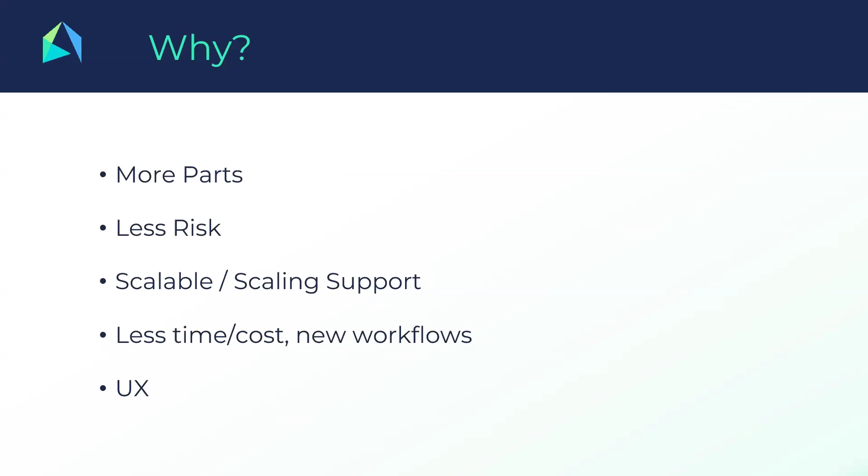And you want to spend less time on nesting, because it's something that needs to be done, but you can spend hours on it, or you can just do it in minutes. And you want a user experience that is at least reasonable, allowing you to work quickly, easily, and the way you like to work. And all that is related, as I mentioned already, to cost per part.

Because if you have more parts broken in your batch, obviously that's raising your cost per part, and that's related to putting more parts in the batch, which might be a good thing, and which of course brings you a lower cost per part. But if on the other hand the risks increase, then it will again increase your cost per part. So it's finding that level between quantity and quality that you need to be able to play with when looking into build preparation in general.

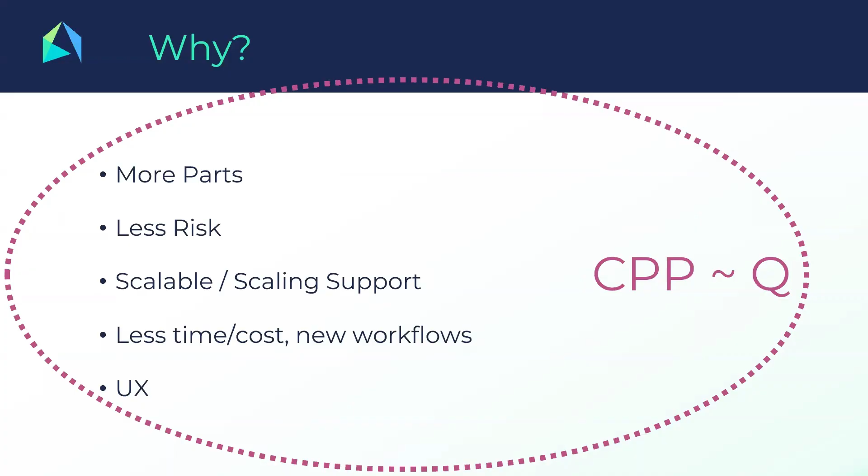And so that's our focus. So anything that helps us with that focus, we believe also helps you. And that's again why we want to hear it from you. Now, in version 3.0.2 — actually, 3.0.1 was only a month and a half ago or something. So we're moving fast. We're bringing out new features quickly.

And in just over a month, we added, for example, the automatic collision checks. Automatic meaning they can be automatic; you can choose that in the preferences. I will demonstrate that later, or you can do it manually as you wish. You have a lot more options when it comes to the part list output, also to output it as a JSON file, which means you can put in a lot more data, which you can reuse in your automation or in your upstream and downstream workflow, your MES systems, etc. And that touches already a bit on automation, something I will be mentioning soon.

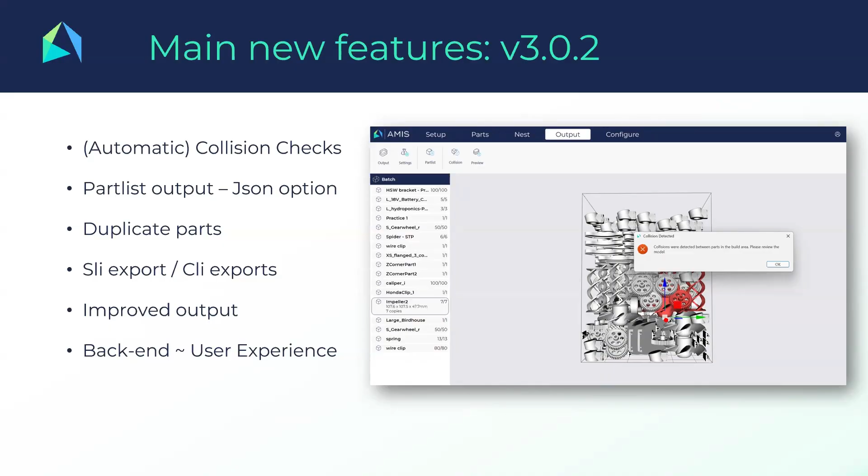You can now duplicate parts. You can do SLI exports, CLI exports, which is of course needed for a couple of SLS machines. There is an improved output, which maybe you won't notice, because in the back end quite a few changes have been made. Some of them very noticeable, others a bit less. But for example, on the output, you will see that the user interface is much easier. And that hopefully makes your life a bit easier in that sense. So that's what happened recently.

And then an, I would say, exclusive announcement, because nobody else has been informed yet. On February 16th, so in two and a half weeks from now, we will launch our AMIS runtime. I should say officially launch, because we already have a couple of users who are currently running the system, or currently doing tests with that system.

And it's, I believe — no, it's not just I believe, I know it's actually unique. There is no such system available at the moment, allowing you to do real scripting on your build preparation and to fully automate and link your build preparation to your entire workflow. So more details on that will follow. You can all read a bit of the promotion that's here on the slide.

More details will follow, and for a couple of users among you, this will be highly interesting as we move forward on better, more automated nesting. We're definitely looking forward to that. By the way, this is fully operational already—it comes with examples and full documentation on the runtime. So once it's out there, if you're interested, give us a sign and we'll get back to you.

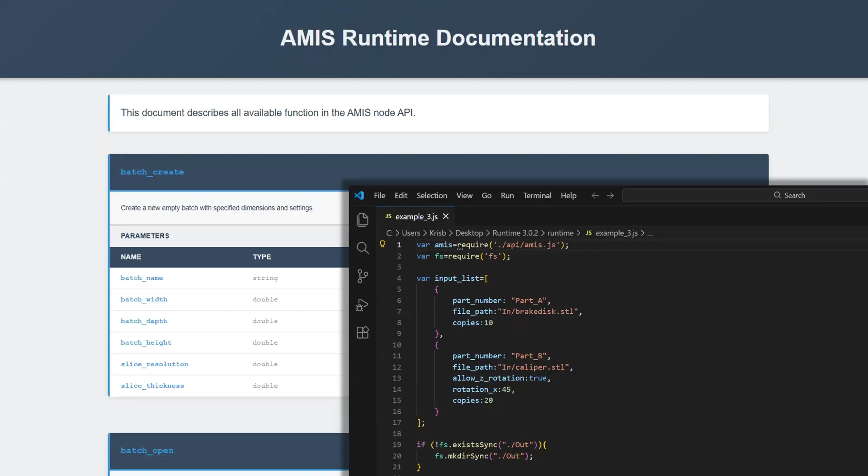I promised to keep it short, so let's move on to the demo. I think it's important to mention that a lot of these examples actually come from our users—things they struggled with, or new approaches they found. Those stories are very welcome because we can immediately reuse them in our demos.

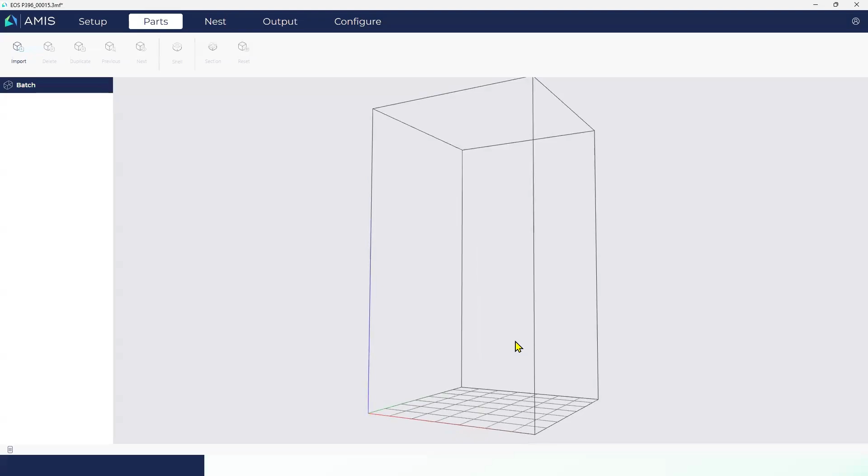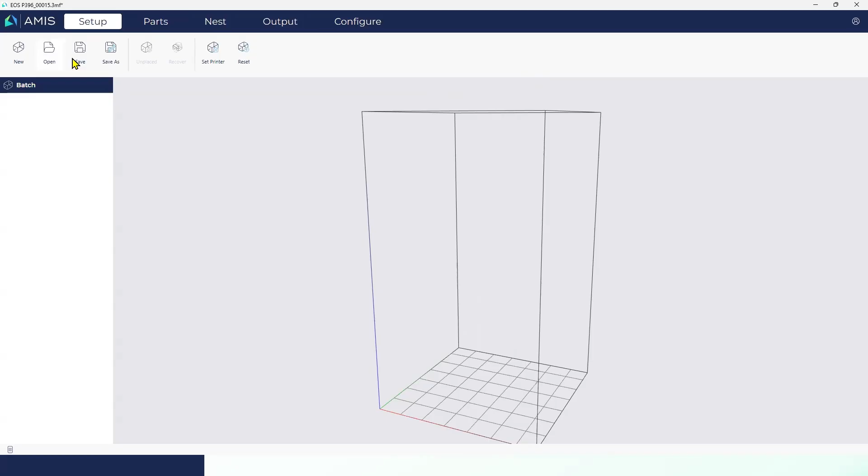So here we go with batch number one. It's an EOS P396, although you might notice there's actually a no-build zone missing in the printing batch area. That shouldn't be difficult to fix—it's just the same amount of clicks. You can either start a new batch with the same dimensions in setup, or open a printer that's already predefined. Here I've got my P396 predefined with this no-build zone already included.

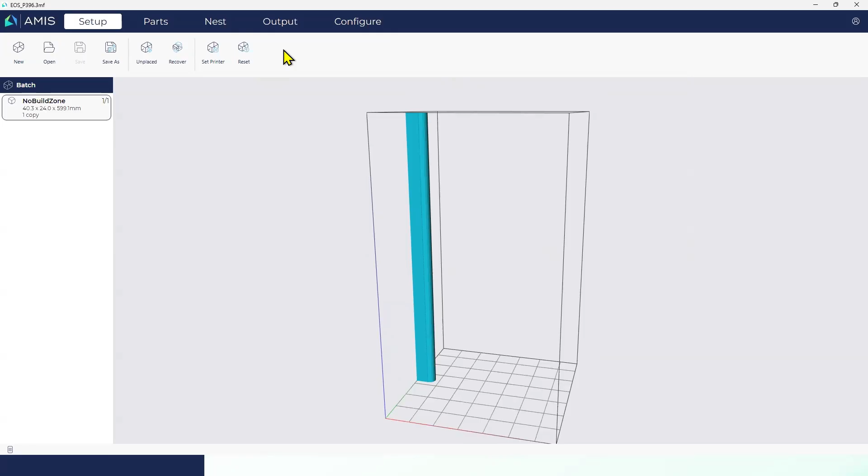I've made this a hollow part, because it will have much less impact on the nesting density—it's in there, but hollow, so it doesn't influence our nesting procedures. As most of you know, in AMIS Pro you normally go left to right with setup and then parts, though you don't have to—you can always go back. Let's put in one specific part. I'm starting with just one part for now, because it was a question I got yesterday from someone in this webinar.

A question we get quite often is about import—do you do a check and healing on import? Some people are used to software with lots of parameters for import and repair settings. The answer is, you normally don't need that anymore. We do a check upon import on file integrity, and we repair a lot of things automatically at the import phase.

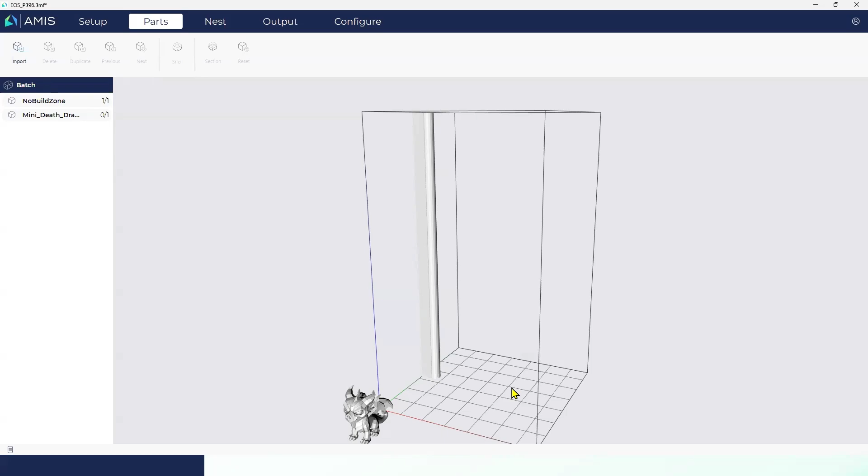So basically, we're still looking into this. We did have a few parts sent to us by users saying there was a problem importing, even though it seemed okay—so we adapted that, but it only happened once or twice. If you still have parts that won't open here, we'd be glad to know, but we repeat that request every time and never get parts that aren't properly imported. So yes, we do file checks, yes we do file repair, but it's automated and done upon import. That's an important thing to know.

The question I got yesterday was about parts where somebody wanted to do shelling, but didn't want to redo that shelling every time upon import. He wondered if there was a way to save the part. Actually, yes, there is. So let's take this part—hang on, I'll double click.

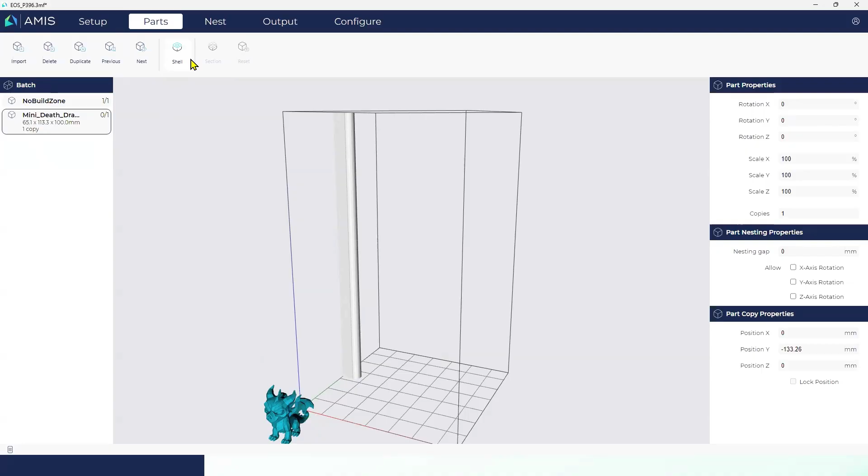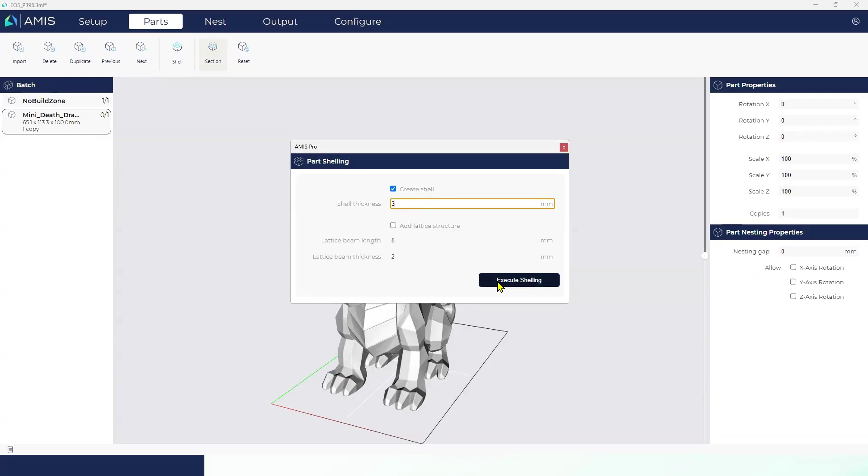We're in the part view now, and I click the section view so I can go through the part. You see it's not shelled yet, not hollow. So let's put a shell in here, for example 3 millimeters. For people new to AMIS, you can also add a lattice structure and change its dimensions here. But for now, let's just add a shell to this one—there you go.

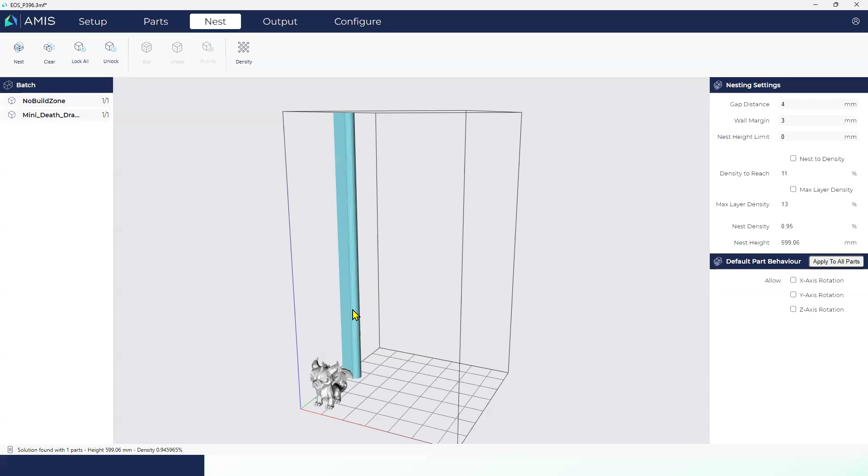That's the shelled part. So the question was, can't I save that part somehow? Well, actually you can—if you just nest the part, you do have to remember to delete this one, then you output the part.

And now I've already, oh, this is a TIFF. I will change that in the settings and make that a mesh 3MF file. There we go. So there we got the output part.

And if I now reopen just any printer, but I will go back again to the 396, I can just import that one part, which I think I saved on my desktop. Okay, I keep on forgetting that. Then it's hopefully here. Did somebody see where I put it? I don't.

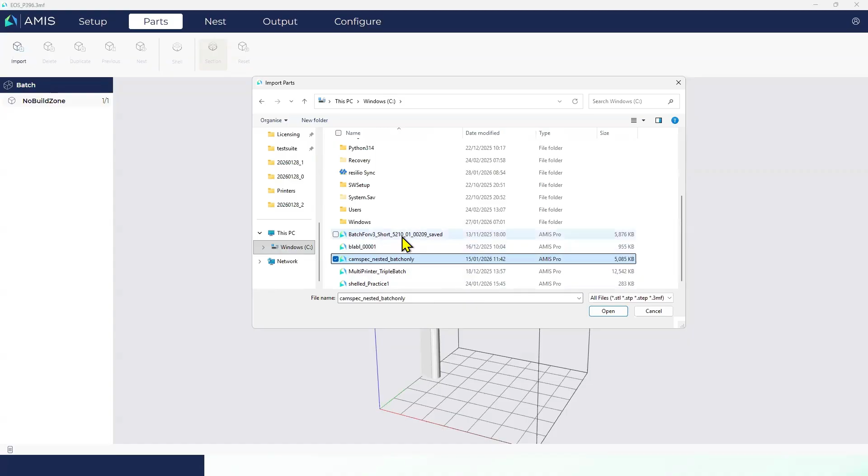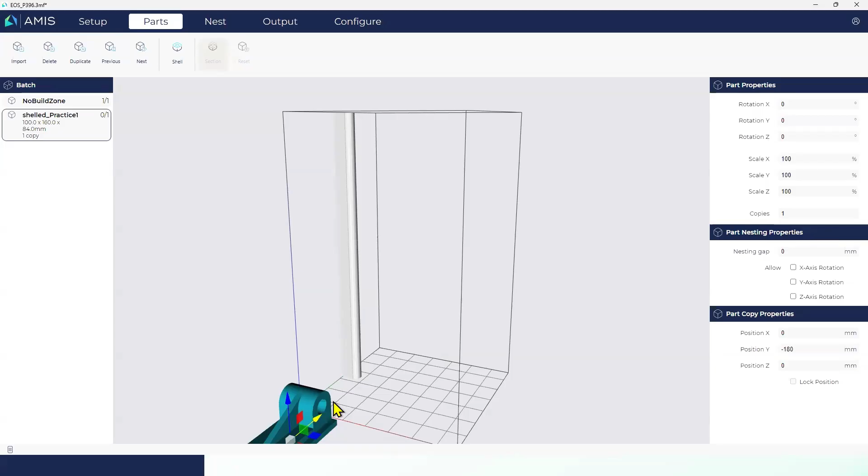No, this is another shell part which I used. But anyway, the part that we exported is saved as a 3MF file, which can then be re-imported and is saved as such, of course, as a shell part for future use. So that makes things quite a bit easier.

Now, I already noticed, and maybe you didn't see it, on the output, things got quite a bit easier. Meaning, it used to be possible here to click on the output for a 3MF, an output for an STL file, etc. Now we just connected the printer with the output type, meaning that once in your printer, you will configure what your output type will be.

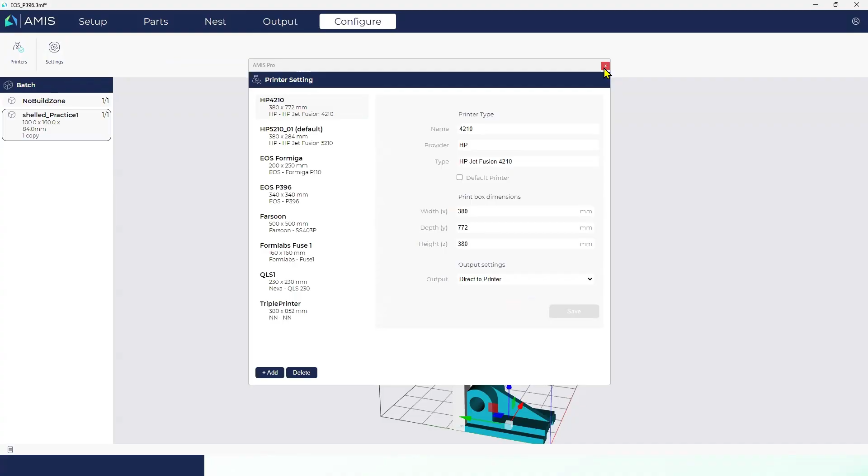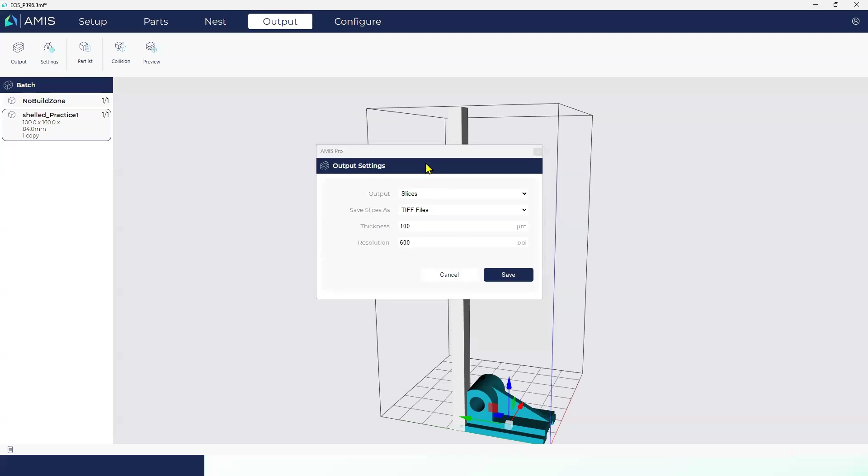So you don't have to redesign that each time. And as that printer has been selected, it will automatically, when you output it, select that preference. So here for the EOS, apparently I put in that it should be saved as a TIFF file, so it will automatically indicate that. Nevertheless, you can still overrule that. You can go to settings and change it here so that you overrule the normal printer settings.

So that's a bit a new view for many of you. But it makes it easier because there's no changing of settings or no selection needed anymore. You can just output.

Now you also see that I created here a nice collision, which, by the way, is still the only way you can actually have a collision because the nesting algorithm doesn't allow for collisions to happen. But of course, if you have a full build box with lots of parts in it and you move one a bit around, it is possible that you create a collision yourself.

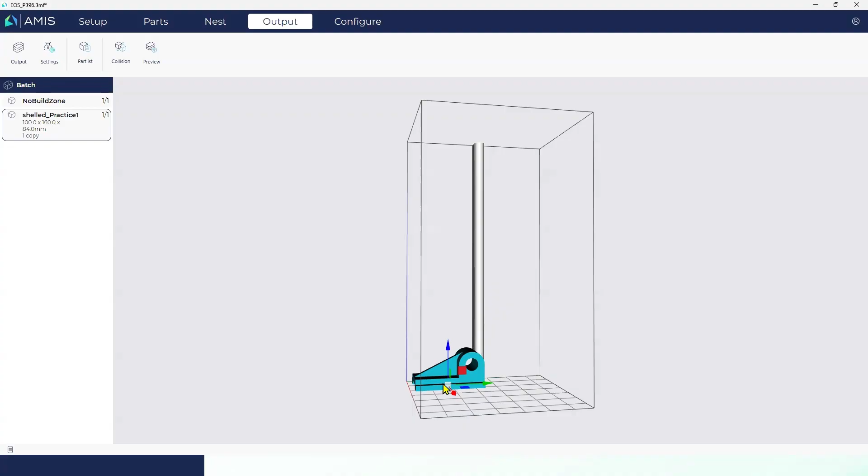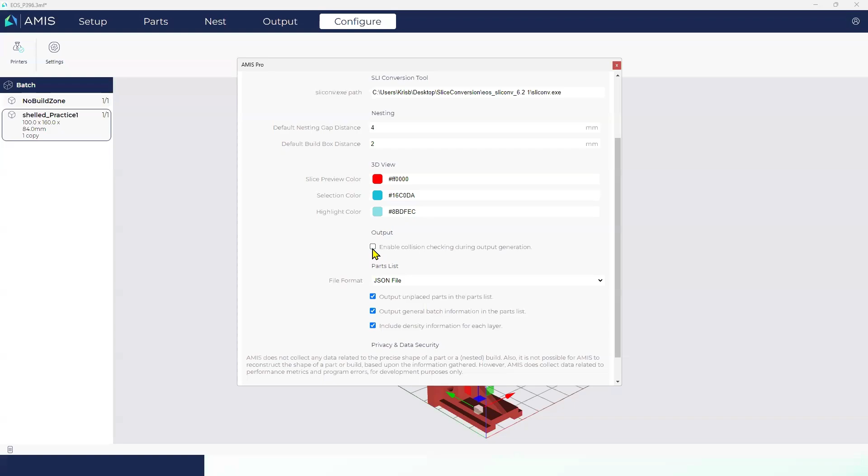Now you can do a collision check. Here's the button, and so indeed, yes, a collision was noticed. But we also made it possible to do that automatically, as I indicated before. So in your settings, you now have this extra output, which you can put on or off, which enables the collision checking at every output. So basically that means you're safe. If you put that on, automatically when you output something, it will first start with doing a check on the collisions. You can put it on or off as you wish, but please don't.

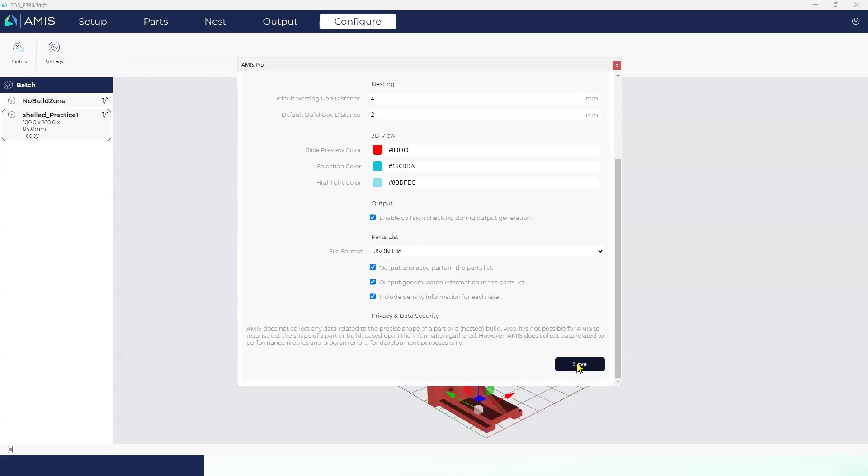Please remember to click the save button here below. Otherwise, it won't be saved. So that's already a couple of new features in there.

Okay, let's move on perhaps to a next batch. I will discard this one. I will create a new batch and I will start adding some parts inside. And then, of course, I have to go back to my workflow. Here's my backlog. Let's put in something that is quite...

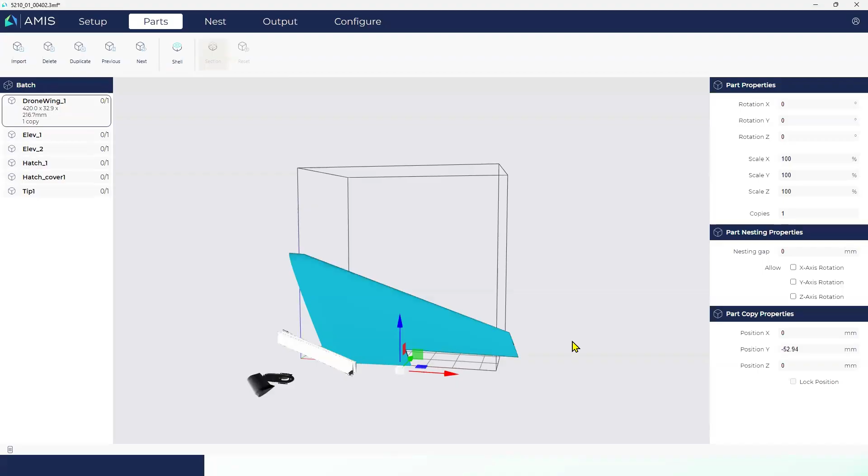Well, seems to be a lot of demand at the moment for this. Some drone parts that I put in, and then actually it was also just a couple of days ago that a customer asked me, okay, I want to rotate this part because it doesn't fit into the build box, but if I double click it to start rotating it, I don't see where it is anymore. I can't really know if I'm turning it correctly.

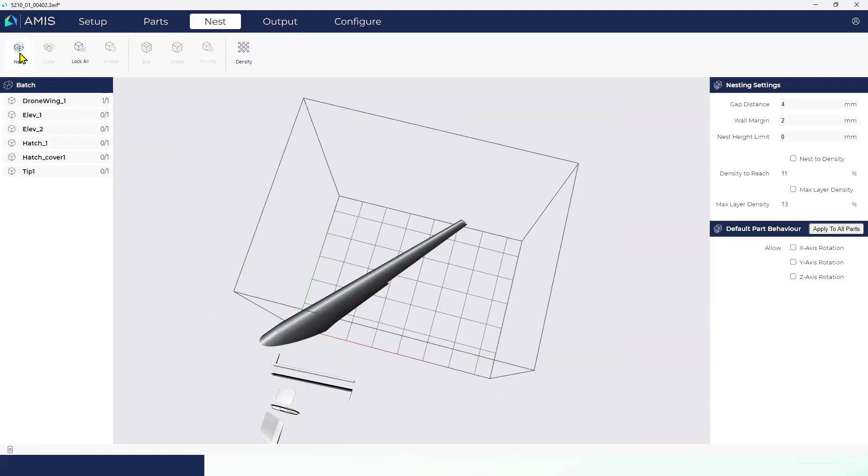Like, oh, let's try something like this. I have to go back, see in my batch, like, oh no, it's still not fitting. By the way, if you just nest once, you can see if it actually fits. No, it's still outside, so it means it doesn't fit. So he was struggling with this idea that you can't see how it actually rotates. Now, I think it's very important to realize, and it's also mentioned here in the settings, that you can rotate your parts also by using these shortcuts, Alt X, Y, Z.

Most people put it at 15 degrees. So basically your part manipulation with each click will be 15 degrees in X, Y, or Z, because obviously that works very quickly for your daily or normal rotations.

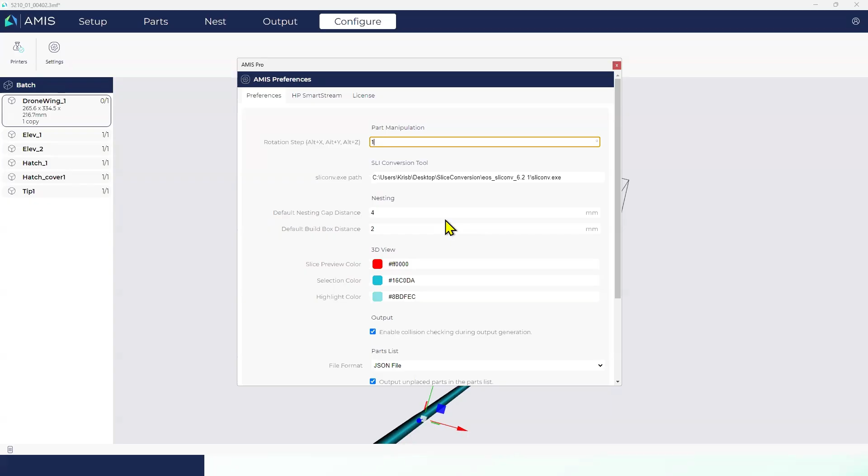However, in this case, I'm going to put it at 1 degree, and actually it does go quite fast, so there's not so much reason not to. I go clicking Alt Z, and I just keep it in rather than clicking 15 times, and then I rotate. By holding Shift at the same time, I rotate in the other direction, so you can immediately see if it will be fitting your build box.

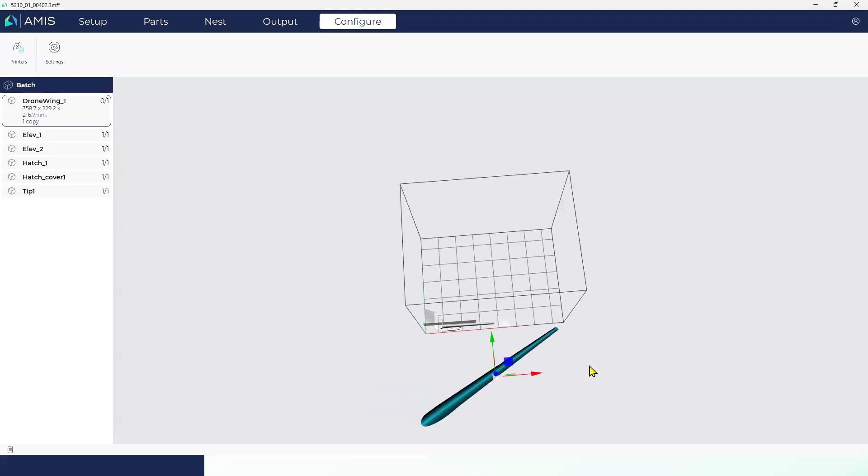So if I now try to put it in, normally the part should fit in there. Good, so that's one part in, but obviously that's not enough yet. So let's continue building this specific batch, this specific build.

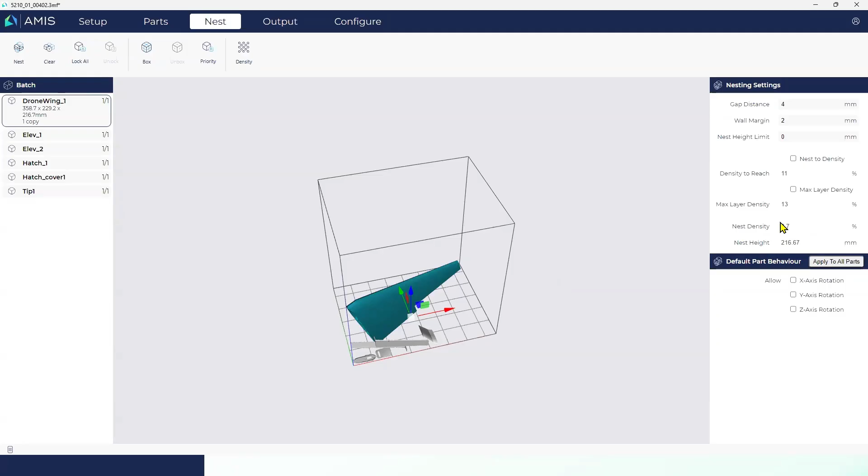Quite often the difficulty is those wings, because you want to print as many as possible, but they take a lot of place, whereas the other parts are quite small and easily fit in. So you end up quite often with nesting densities for this type of part which are very low. So basically, you want to try and put in more parts.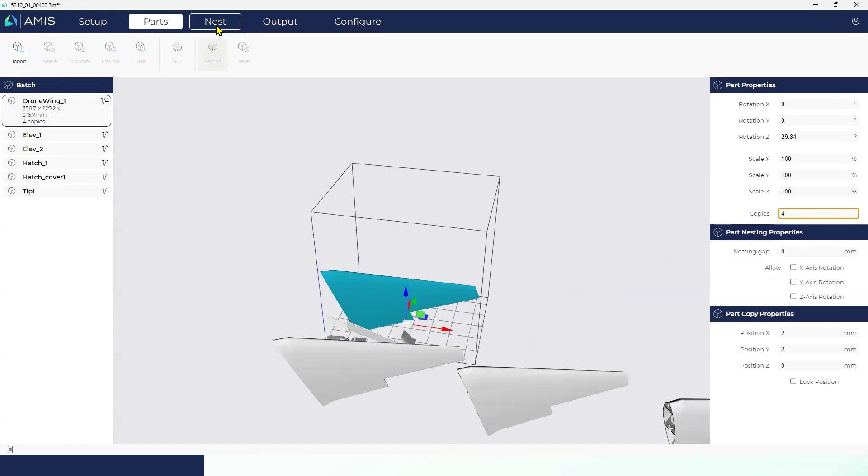Now let's start with these wings, and I go again to parts so I've got my part details here, and let's put in some more copies. Let's see if we can fit in 4 parts here. I first want to work on those because they're so tall, and I want to see what I can do to improve that. Okay, seems like I can get in 3 parts without any further movements.

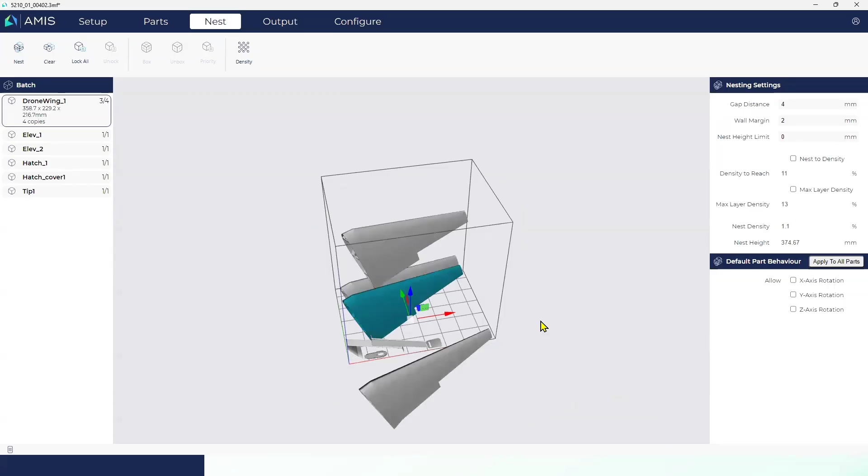And I would like to, if possible, have 4 parts maybe. So let's see if we can get in more. Now there, we got 4 of the same parts here.

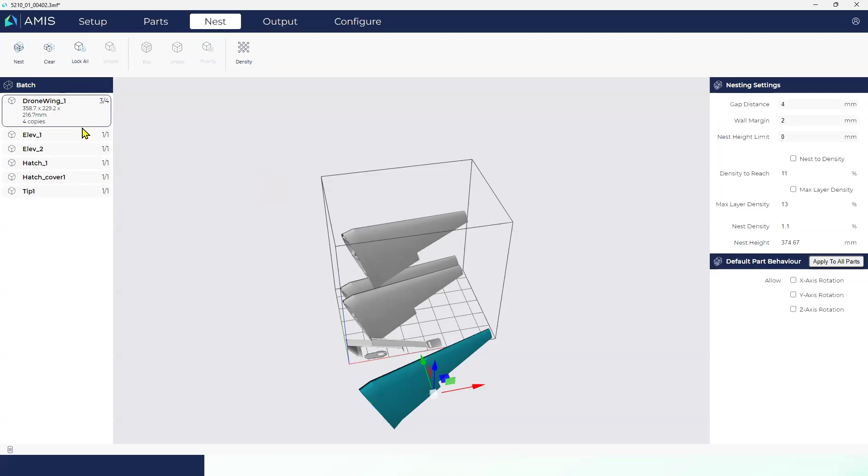Of course we work with, and that's an important distinction in AMIS, the difference between more copies of the same part versus a different part. First, nesting different parts costs a lot more time in the nesting. But it also works faster if you have more copies of the same part, because it's easier working.

But in this case, maybe 1 or 2 more parts will fit if I'm able to change the direction of rotation of these parts. Let's leave those 3 as they are, but maybe another one will fit if I rotate the parts a bit. Of course, if I start rotating this one, they will all rotate, so that's not exactly what I was looking for. I can rotate those, but that's not going to help me get in more.

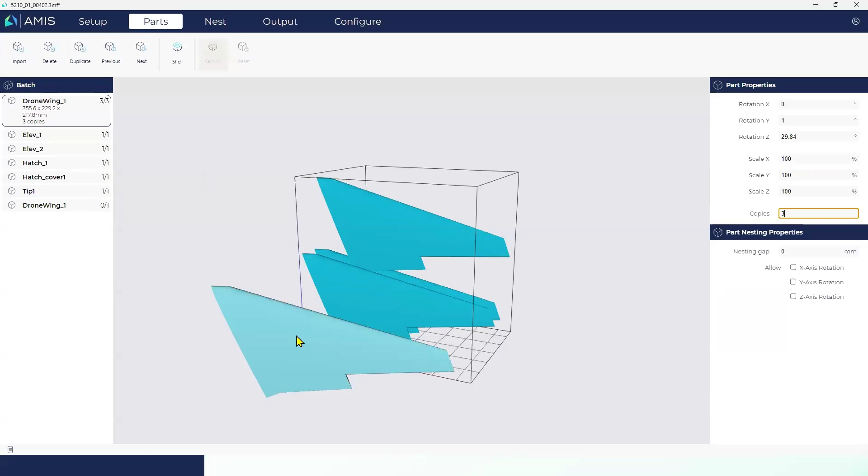So at that moment, I have to duplicate my parts. Now let's first reduce this to 3. Voila, so that I have them all in here. And then I will duplicate this. There's my duplicate, and with that one I again start working.

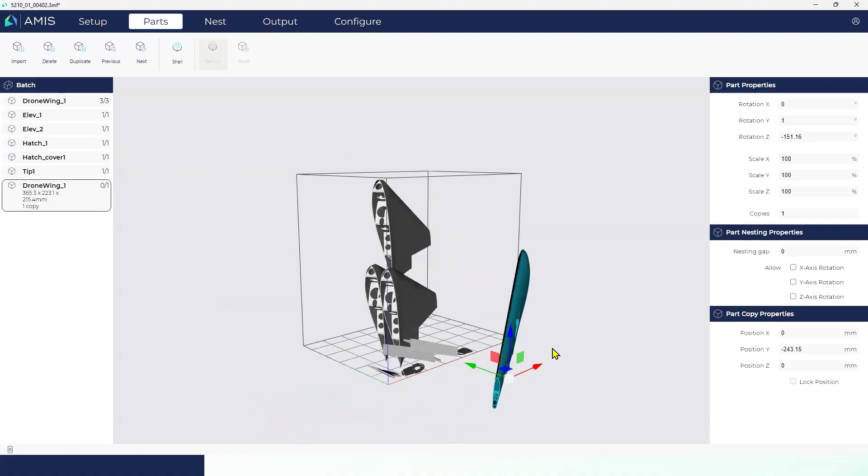Let's again take the top view just to have a bit of a view on what's happening there. And then I'm going to do this rotation the other way around because I want to have it fitting in, hopefully like that. Any part that you win can help in lowering that CPP. Now I'll perhaps also rotate a bit like this so we have more chance of it fitting, and then nest it already and see if that works.

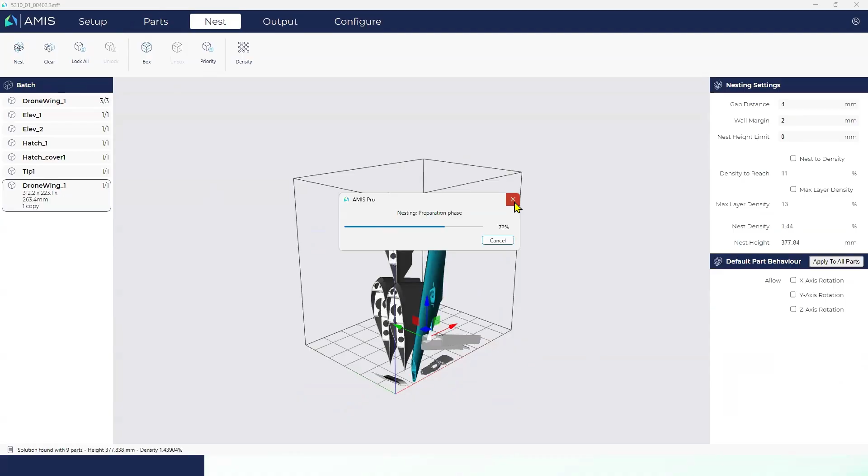Okay, there we go. Yes, it fits in 4 parts.

Now, just for the example, I'm going to start increasing the quantities of the other parts. Let's put in 200 of those. And then again, I don't go clicking here, I use Alt N for next part. So I'm now here, Alt N, next part.

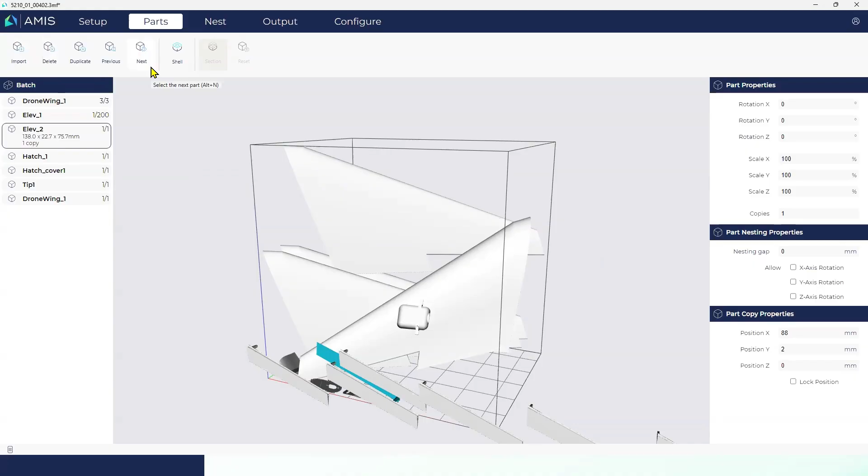As you can see here, if I hover this button, it says select the next part, Alt N, and with the others as well. If you don't remember the shortcut, you can always hover over the button to see what you need to do.

Let's say 150 of those, Alt N, next part. Let's say 100 of those, and then 150 of those. And this last one, maybe 50 parts, is the drone wing.

So I've already entered the numbers of parts. Of course, there are more properties that you can actually influence here in the parts section. You can rotate also by typing here, but before, of course, we did it using the shortcuts. You can scale your parts. You can change the copies. You can also change some of the nesting properties.

So the nesting gap, and later on we'll look at the nesting, of course. The nesting gap is something which is decided on a nesting basis, and the gap distance is 4 here. But in some cases, you might want a higher nesting gap for specific parts, and then you can put it in here for specific parts. Now I leave it at 0, so it will anyway go for the gap distance which is mentioned in the nesting section.

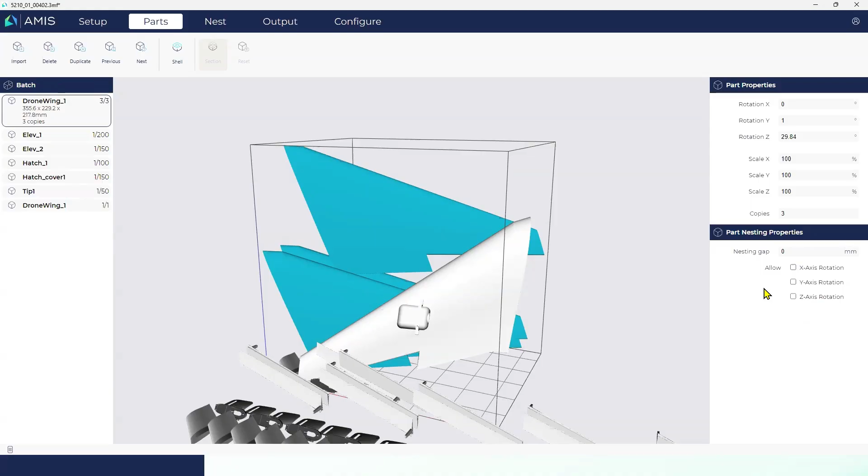And I can allow rotations, meaning that during the nesting, that part is, for example, allowed to rotate over the x-axis or z-axis or multiple axes. Also, if you click on one instance of a part, so one part specifically, I can take one outside the batch, for example, you will get its copy properties, meaning its position.

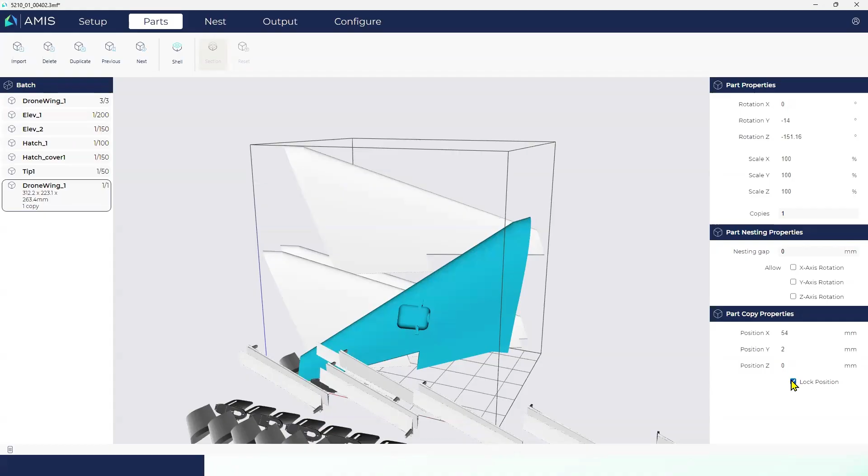Now, this part is outside of the build box, so I cannot lock its position. But when it's inside the build box, I can actually say, okay, you stay there. I lock the position. It won't be changed anymore during the nesting operation. But anyway, we've set all the quantities, we've set the rotations. We think we're good here on this part. The shelling we demonstrated before. So let's see if we can get this one nested.

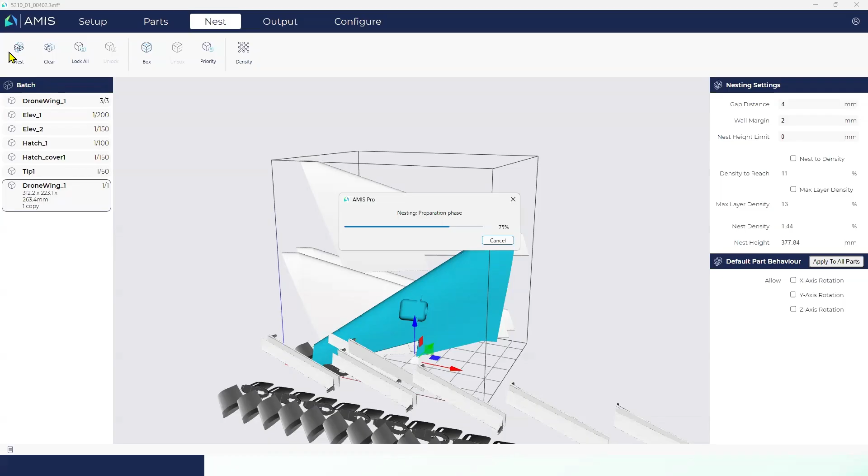And that's already two important things with AMIS Pro. First of all, nesting is pretty fast, so it's meant to iterate. It's not necessarily your final build that you're going to get out at the first try, but you're probably going to iterate. You're going to have a look at the result and then move forward from there.

Like, okay, I'm now at 98% and it's still looking for solutions, and that's then the second important thing: cancel. There is, while iterating, no reason to wait for the 100% because we are still improving our build. We're checking, is this close to what we want, is this approximately what our aim is with this specific batch? Now, I'm a bit unlucky in a sense because I was hoping that my wings wouldn't fit anymore, but they did.

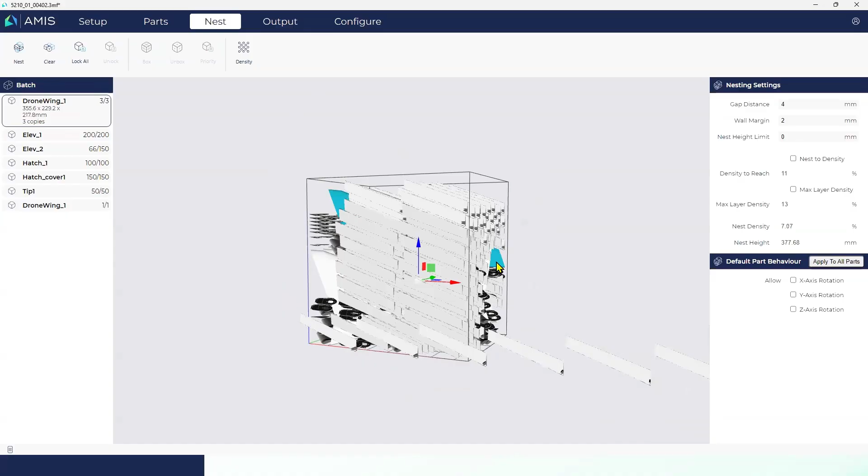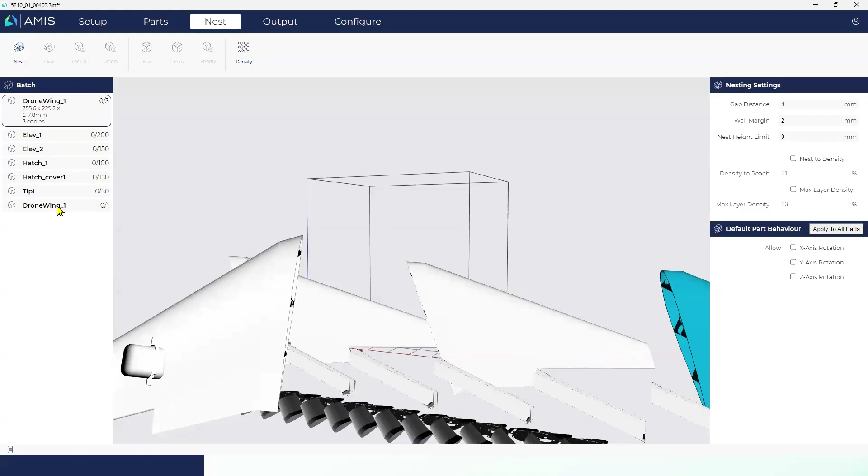However, what I wanted to show is that, and I will clear the batch again, I will just throw out everything and re-nest again. If you want to make sure that certain parts are in first and that they're definitely in, and we already are sure that 4 of these wings fit, then by using control here, I can select multiple parts and give them a higher priority. You see that there is a different sign, so the priority is higher. So the algorithm will first try to nest those before adding the other stuff.

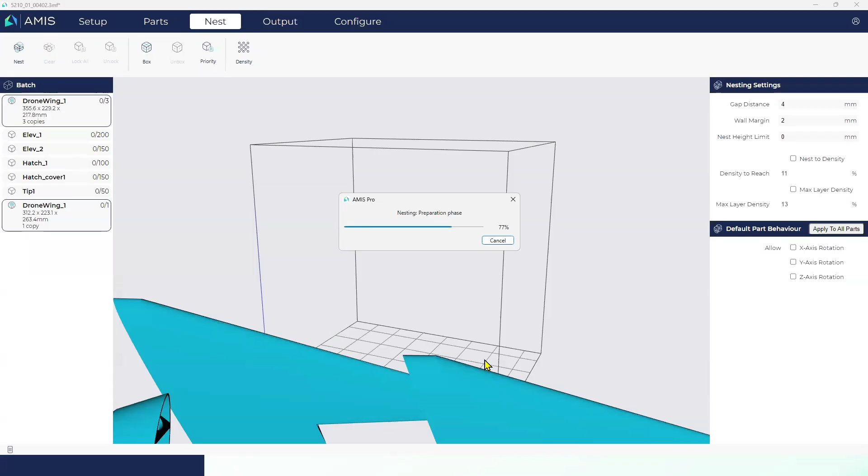And so like that, I'm iterating. So okay, maybe the wings didn't fit in the first time, so I'm iterating and now trying this to get the wings in for sure, so that we're okay on that side. If you would like, you could now also really block those drone wings, meaning locking their positions as set. But for now, I will leave that.

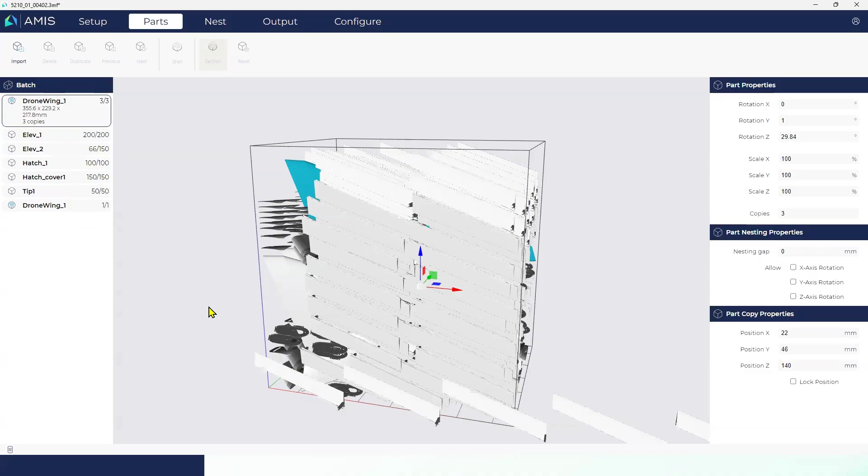Here you see how many parts fitted inside your build box, so you can also make decisions based on that. If you say, okay, only 66 of those, let's try to minimize those quantities and put in a bit more equal spreading there. So that's also a change you could be doing at this point.

I should also mention that with some software, they take the average density over 2 millimeters or something, so it looks like there are much fewer peaks. We give you the density with every layer, so you really see every peak that is coming through.

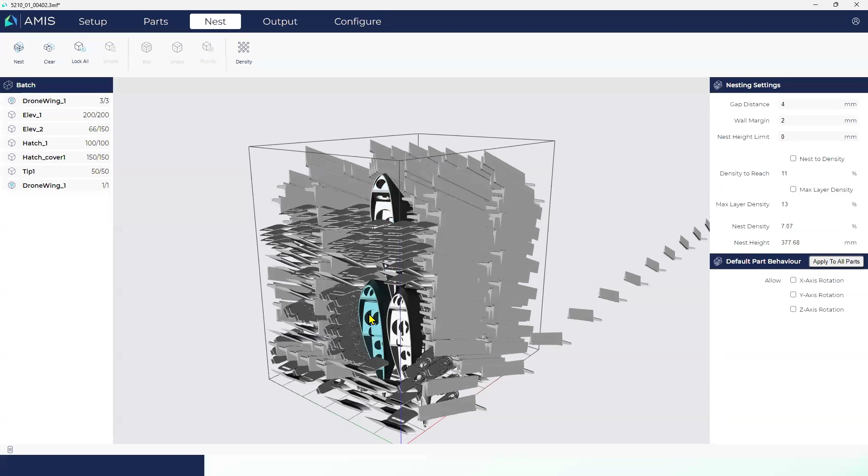And then, of course, it's up to you to decide whether it's acceptable or not. But in the third example, we'll go a bit deeper into that nesting density and how to really go for it, how to really improve that. For here, I think that the most important thing is the part rotation. How can you go about it? So there's a couple of ways. Prioritizing parts and the relevance or the use of that.

And then on the rotation, by the way, we could also, of course, in our nesting still allow the Z-axis rotation, for example, applied to all parts. So now the algorithm has much more opportunity to go looking for alternative rotations of the parts, usually turned over 90 degrees over the Z-axis. So the nesting will take a bit longer. And that's why quite often, if you're iterating your way through it, we see that the users will do this as the last step.

So you're happy with the result already. You're close to what you want, but you want to check if maybe you can add a few more parts. Then that's maybe the right point where you say, okay, I'm going to add more, or I'm going to allow rotations so that maybe a few more parts will fit inside the build box.

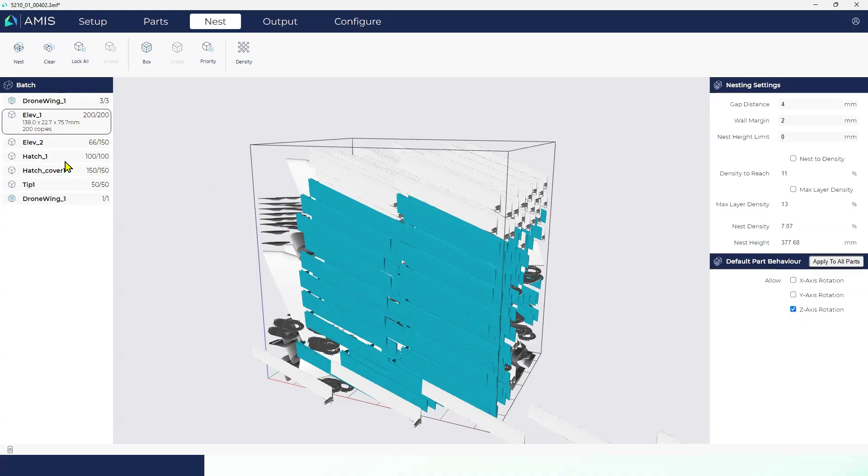One small detail that I didn't note yet. By using Shift and or your Control button, you can select multiple parts at the same time, meaning you can also rotate them at the same time, usually over 15 or 30 degrees. In this case, I'm a bit freewheeling. And as long as I end up with nesting, I'm not afraid of any collisions inside the nesting, because the collisions, if they come, are normally because you put some part in place, you lock them in place, and you created

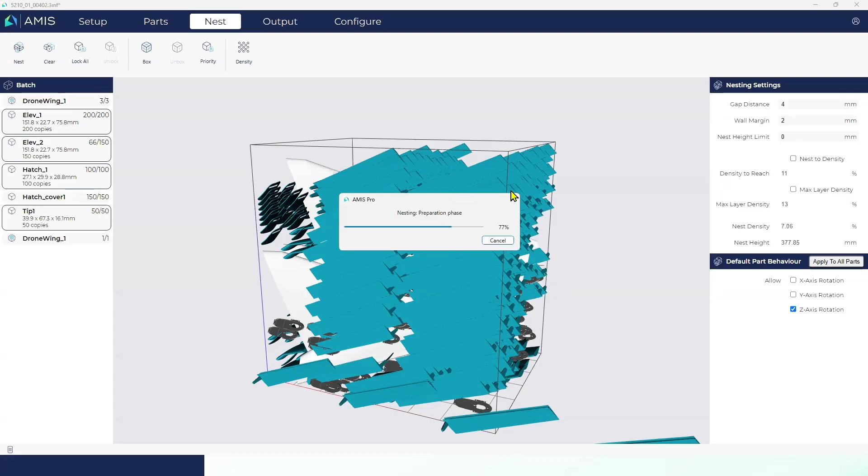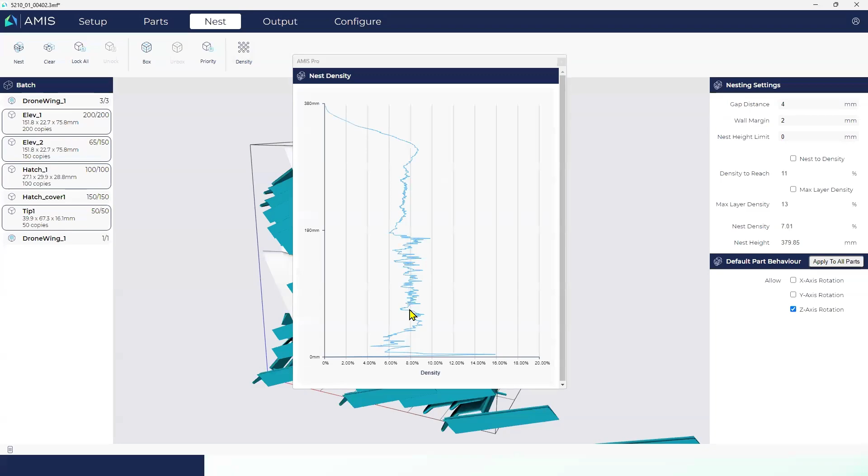the collision by yourself. As indicated, my nesting does take longer because, with allowing this Z rotation, I'm giving a lot more positions to be checked. So that takes a bit longer there. Okay, but we're already at an initial solution with now 7% density, which indeed, given the specific part, is probably the maximum we can get out of this type of batch.

Good. A third example, which will take me another 6 or 7 minutes, which should allow you to still ask quite a few questions. Let's see what we're going to open next. Discard this one, because I want to zoom into something specific here. And that is indeed the multiple batch nesting, but mainly about the densities and controlling the densities.

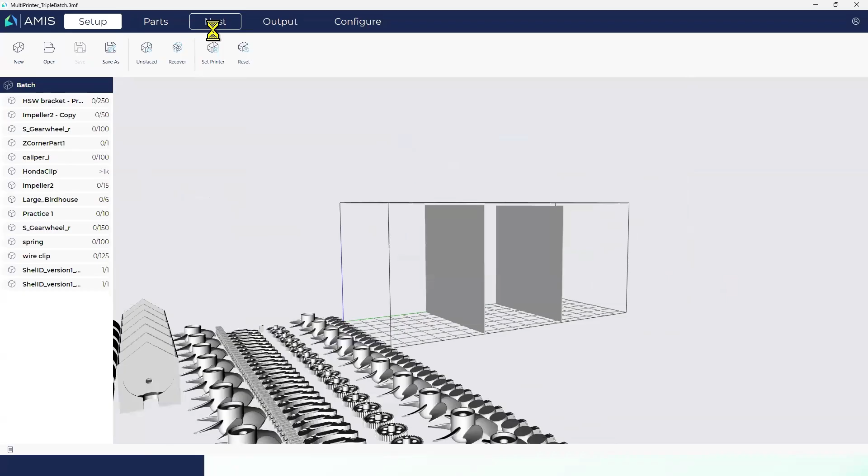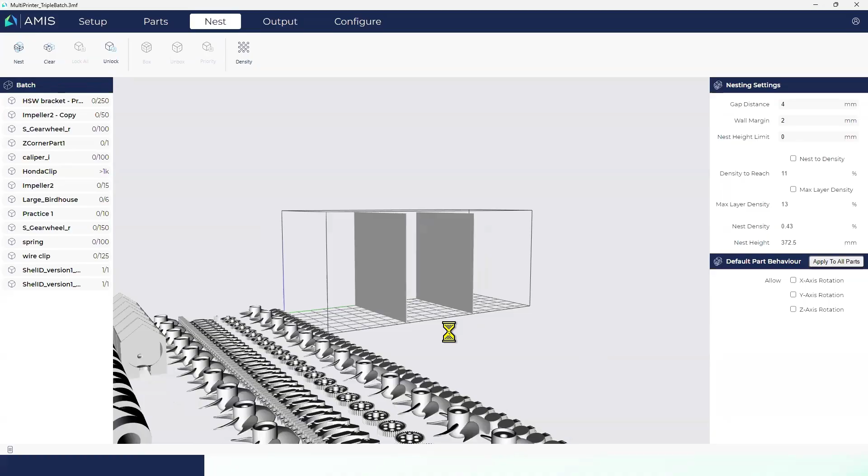This is just an example based on an idea by one of our users. He's having multiple batches, multiple printers to nest in there. What you see is that sometimes if you run it one by one, maybe all your bigger parts will end up in one batch, and then you're left with the smaller parts. And that's not a perfect division of your parts over different build boxes. So he basically built himself a printer.

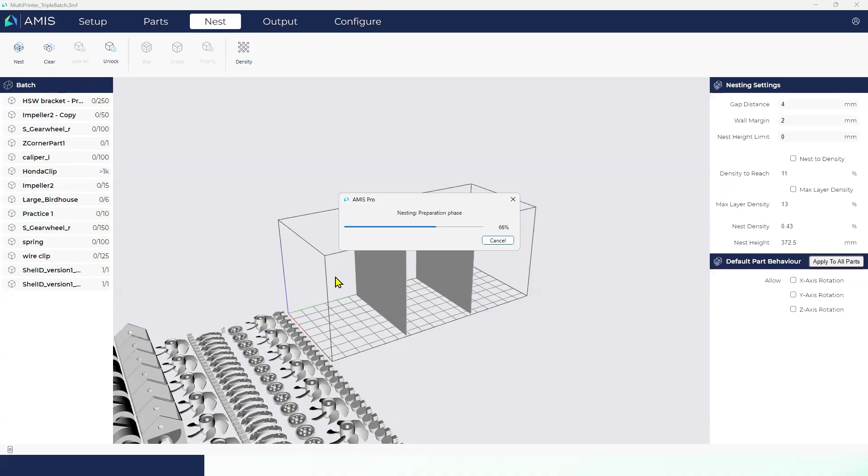He added a printer, which is this one, a triple size printer, and uses that just to get parts divided over different builds. And then what you normally get is that the parts are quite well divided based on their size over the different build boxes. So you can start working with that. By the way, these parts here in the middle are parts that we made ourselves and which we locked in place. Here, lock position, so as to make that division so that no parts are in between two build boxes.

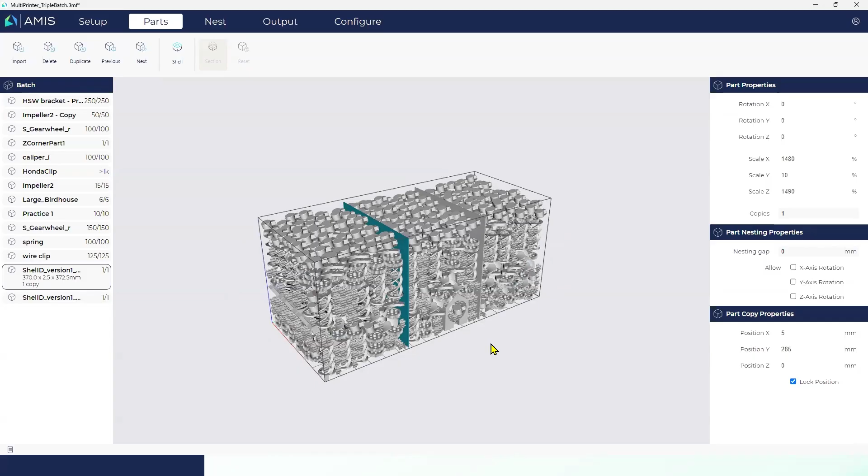That's also something which you can definitely use if you, for example, have SLS printers with multiple lasers, whereby you don't want to go over the stitching zone of the lasers. So then you can apply the same kind of trick. Okay, we're now ending up with 3 printers, but basically you can't really print that. Luckily, you can easily change your printer by clicking here, set printer, and putting that to a normal sized printer. I will update the printer.

So now we've got, I don't know if you can see this well, but this is my one printer. After which I lock all my parts, meaning all the parts inside the build box are now locked. I will clear all the other parts which are left behind, and this is my first build box on which I can start working.

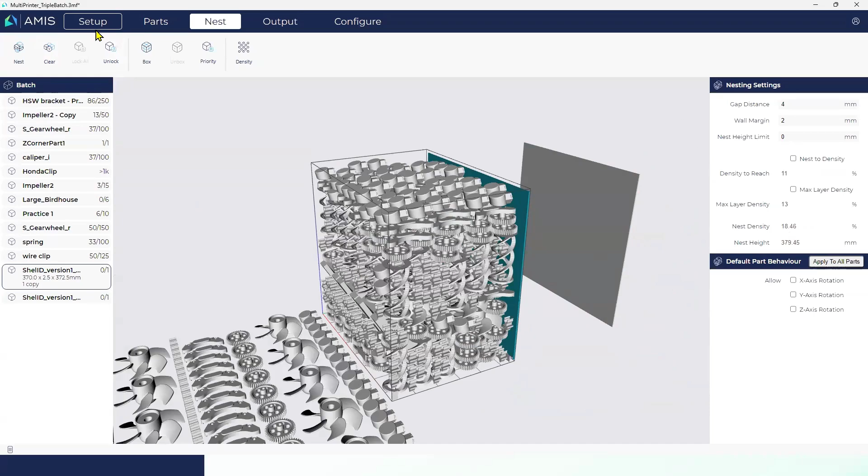Now, of course, this is not an ideal build. If you look at it, it's here a nesting density of 18.46. So that's too high. You just use this to divide your parts, but it's not your real work on the build box, let's say. For that, let's open a quite similar one here.

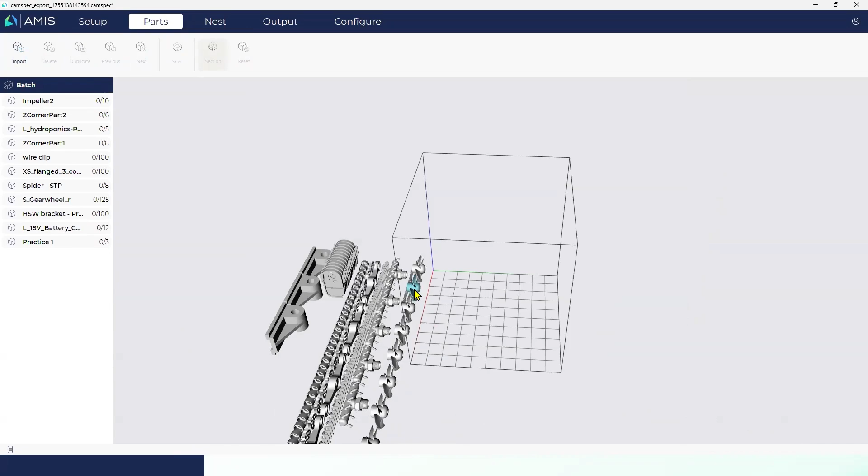There we go. Which is, and some of you might have seen that, a CAMSPEC file, meaning that's a file mainly generated by Phasio, a company we're also working together with on the workflow idea. It doesn't only contain the parts themselves, but also their rotations and their quantities. So I don't have to bother anymore about the part quantities.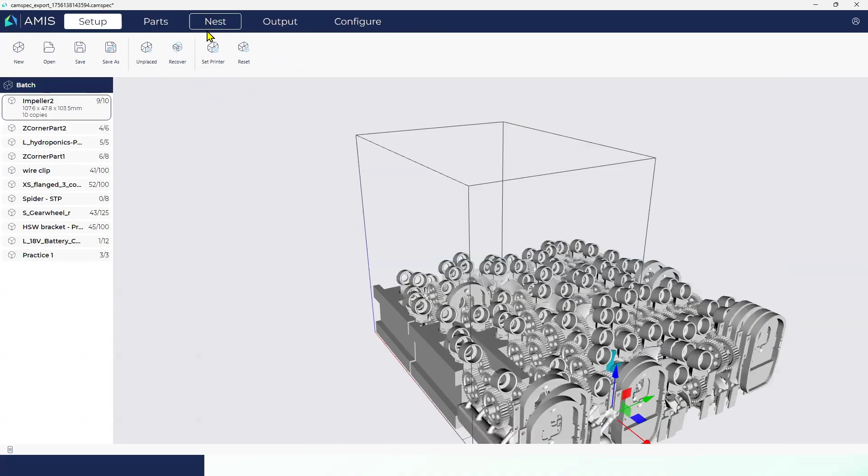Now, if I go nesting this one, what I notice is that I'm actually working on a Farsoon, which was not the idea. So I'll switch it to my HP printer because that's what they were meant for. I will nest again and see what we get there. Okay. The parts inside are very similar to the ones I showed before. So again, we're ending up with a nesting density which is way too high.

The most powerful thing here to work with is your max layer density. Basically, it will limit the density of each layer to, in this example, 13%. Of course, you can put it higher or lower, but now let's try with the 13%, which is set in there. And there you will generate your solutions. Now, first of all, what we see on the density graph is that indeed it's nicely cut off around this 13%. So that's definitely what we want.

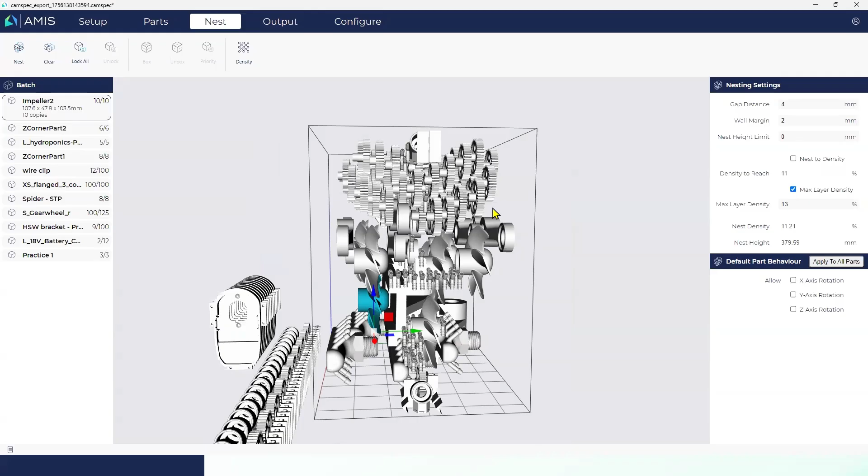On the other hand, what we also see is that the parts are quite a bit in the middle, which makes sense because if you want to check the layer density on a certain layer and move parts upwards as soon as that layer reaches the 13%, it means you have to start somewhere, and we start in the middle because that's the most logical place to start. So that's why they're quite often a bit together.

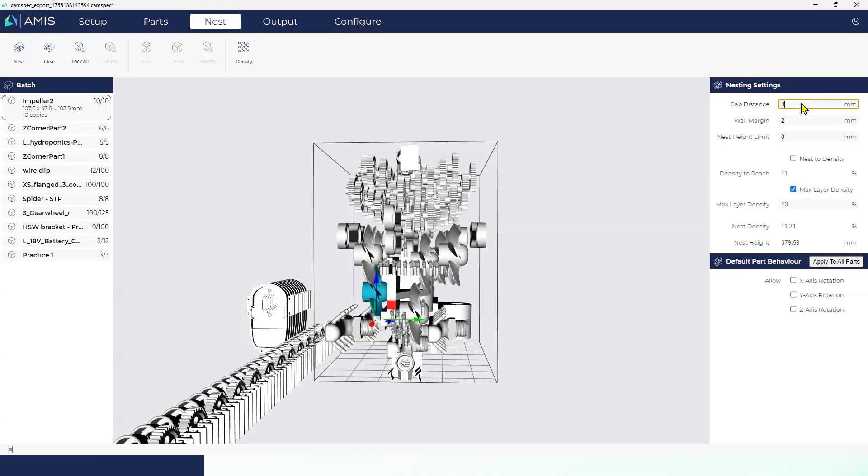So as such, this is printable because we got a nice gap distance, 4 millimeter, and we got a good density spreading. But if this is our maximum to fill up the batch anyway, why would we not increase the gap distance? Because it will lead to an even neater batch and better print quality. So I will just do the same thing with a higher gap distance, and the resulting nesting density will still be the same, but I got more spread out parts.

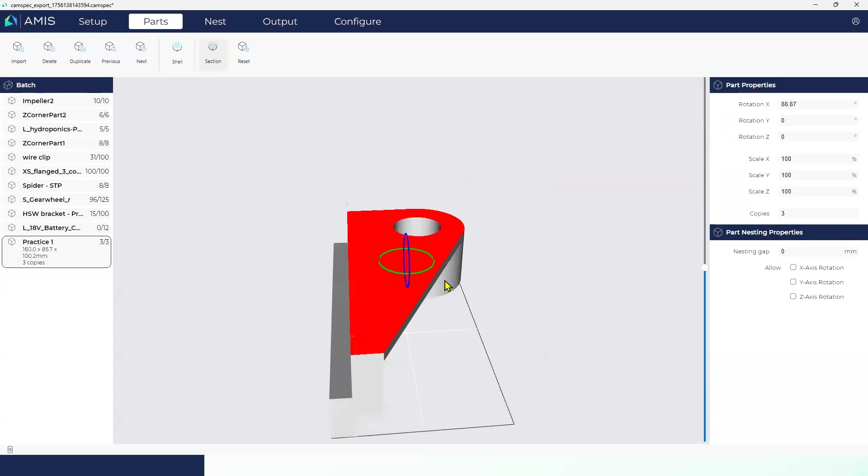Of course, what's ruining this batch is also the fact that these parts have not been shelled. And so they take a lot of bulk mass inside the nesting, so they increase your density a lot. In this case, it's really something you might want to shell, and it will give a totally different result when we nest it. Of course, I know in many cases you're not allowed to do this by your customer, and there are agreements on what it should look like.

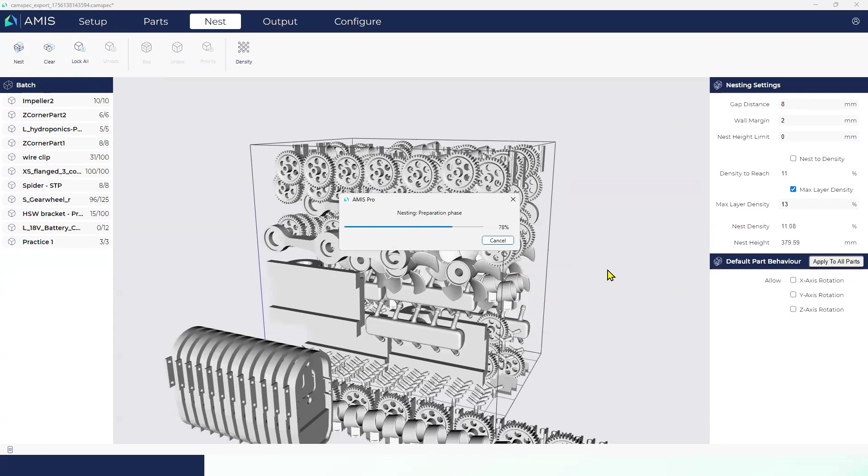But in this case, you will notice that it will come to a much better spreading of your parts. It will give a lot more possibilities to the nesting algorithm to actually put your parts in as you want them. So our density looks good. Obviously, and again, that's the idea with the iteration: it's not like you wait for 10 minutes for your result and hope that it's going to be good. You wait 20, 30 seconds for your result, you check, and then maybe you adapt things.

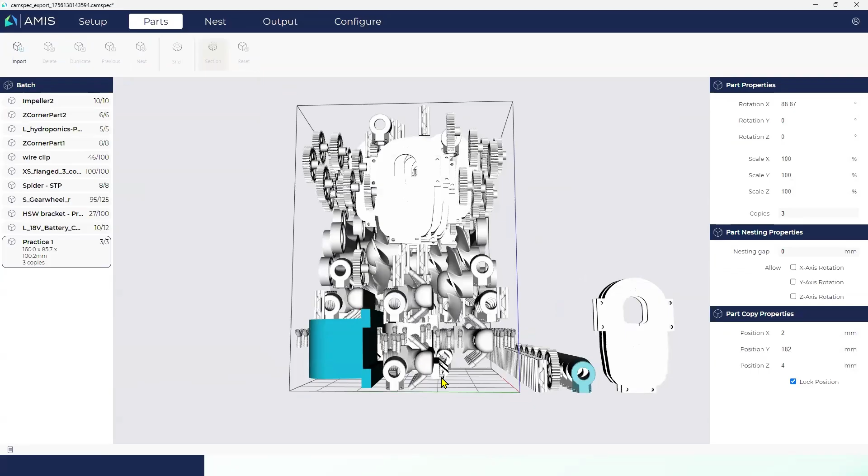So maybe you don't like the fact that this one is down below, touching the floor and at the same height as this other one. Okay, I'm going to pull it up. I'm going to lock its position. I'm also going to lock the position of the other one. Sorry. And where's my number 3? Maybe I want to put that a bit up. Okay, fine. I'm going to lock its position. Of course, I created lots of collisions now, but I don't care because I'm just going to re-nest the whole thing.

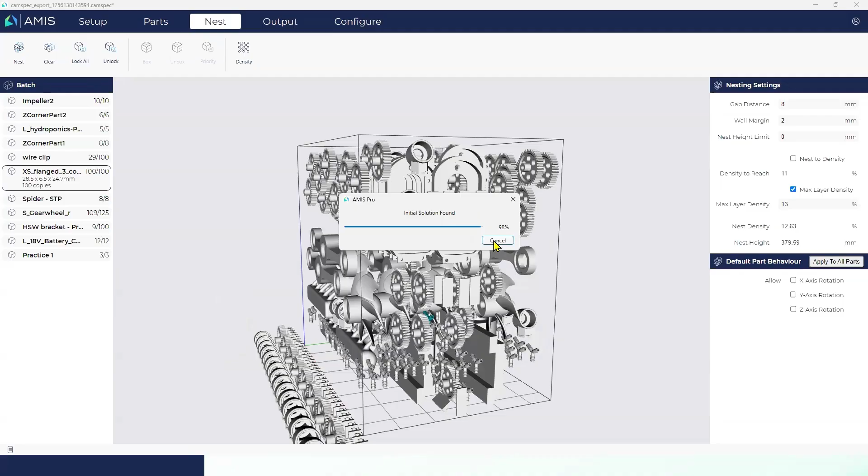And by the way, okay, that's taking a few seconds. Well, I'm running this from my laptop, so there's not so much computing power behind it.

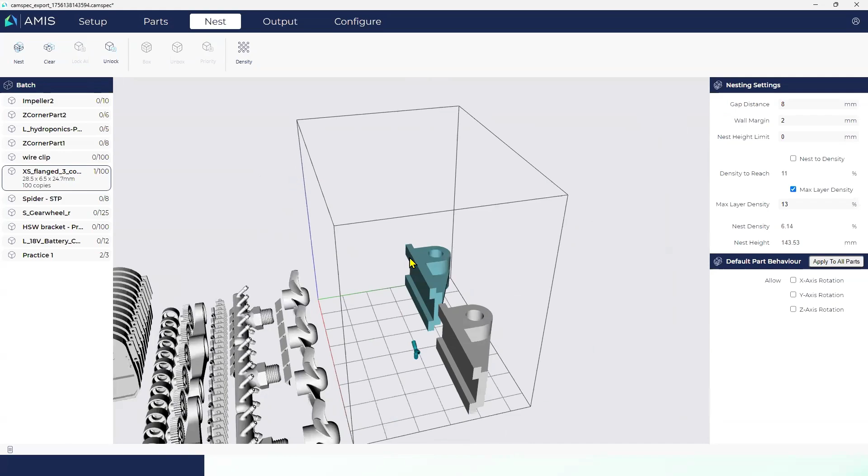By the way, I wanted to say I locked a couple of parts. I can always clear the nest just to see, okay, how does it look? What did I lock? And is it actually not touching each other? So that's another collision check, or check for yourself if there are no mistakes inside there. So clearing, nesting, locking, unlocking, locking the whole batch, locking individual parts are all options you have within AMIS.

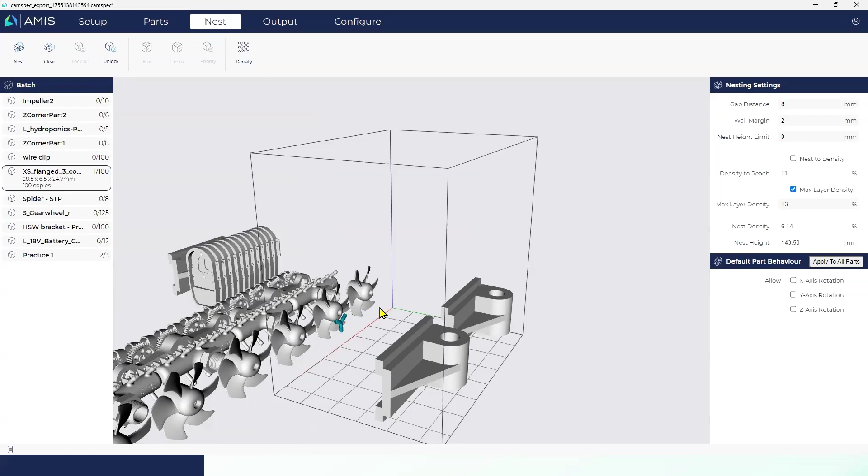Right. Now, I did make myself this nice list of things I shouldn't forget to say. Undoubtedly, I forgot a few because there are more options within AMIS Pro. There are more possibilities. Oh yeah, for example, what I didn't show yet is this possibility to, where is it? Let's take a nice one, this impeller. I will just quickly make a duplicate out of that one. There it is. That's my duplicate.

I will then do a boxing operation, which I can do square or freeform, which I can do automatic or manual in its size. I will execute the boxing, takes about a second. And there you got your box group. Oh, I was too quick. Sorry. Your box group, which then gives you this as a result, where you can fully change the dimensions of the holes, etc.

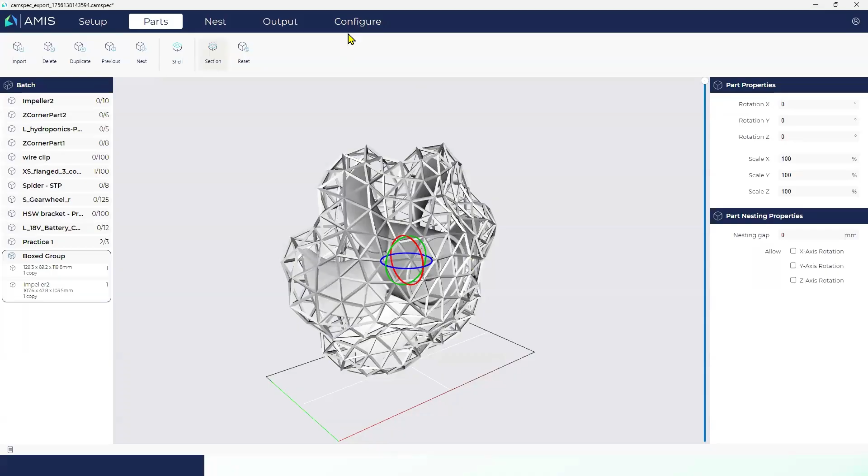And there's a couple of more things, but new in this version is here in the settings, the fact that you can enable the adjacent part list, that the output is now automatically checked for collisions if you wanted to. That this one became much smaller and neater, that also on the output side you got fewer options. Well, basically you have more options, but it's more neatly packed, and you got the collision check in here as well.

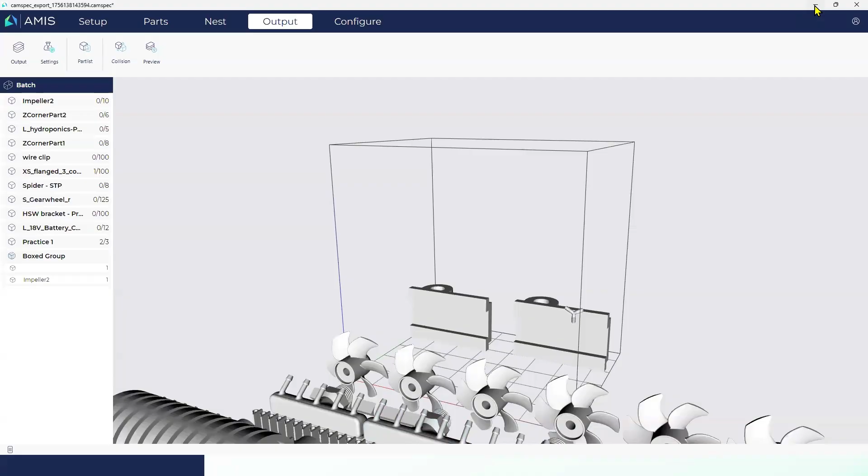Right. I hope this gives rise to many questions, of course. But before we go into that, and please do keep on writing while I'm having 1 or 2 more slides now. Of course, we're working on our next version already, and we do think at this moment we are, well, we see it on the number of people that are actually using our software. We're there, but we want to move much further still.

Next big thing coming up is version 3.5, which will be out by the beginning of May, and that will, for a big part, focus on Boolean operations, meaning putting holes, putting labels, embossing, engraving of part numbers, etc. automatically on your parts. And at this moment, we are doing some research on that, meaning we've already sent questionnaires to a couple of users asking, hey, how do you do this? What parameters would you like to see or use for this or that Boolean operation? If you're a candidate to answer those questions, please let us know. We'll be glad to send you the

questionnaire too. We will also allow aligning your parts to a face. You can immediately say, okay, this part I want it rotated like that, downwards. We're going to do further density optimization, nesting optimization, and Z direction compensations, mainly for the SLS users. So there's a lot in scope, which will be in there by May, and which will be released on the date foreseen.

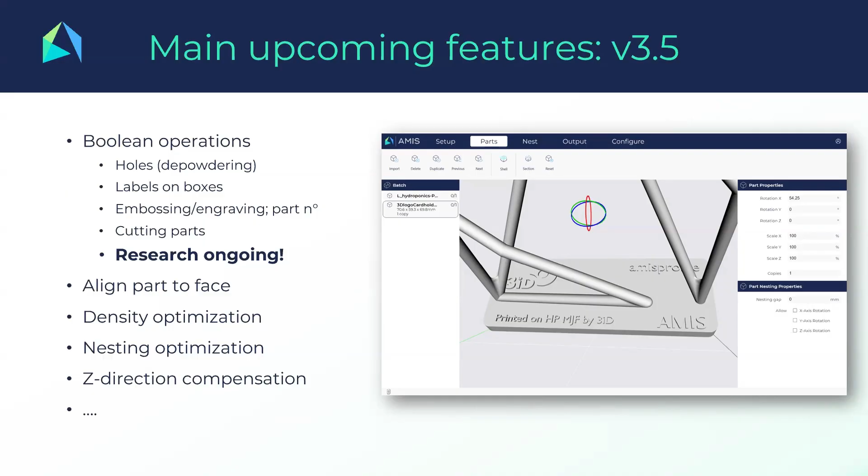I would say over to you, meaning Adinda. Do we have any questions in our chats or in our Q&A? Yes, we have a couple of lovely questions today. We got a question from Stephen asking, when exporting a part, is the current orientation also saved?

Thanks, colleagues, for warning me. Yes, indeed. When you output a file, that means, of course, that the parts or part within it is saved with that rotation from that moment. So yes, just as you output a full batch, also with outputting one part, basically meaning saving that part, the rotation will be remembered. Right.